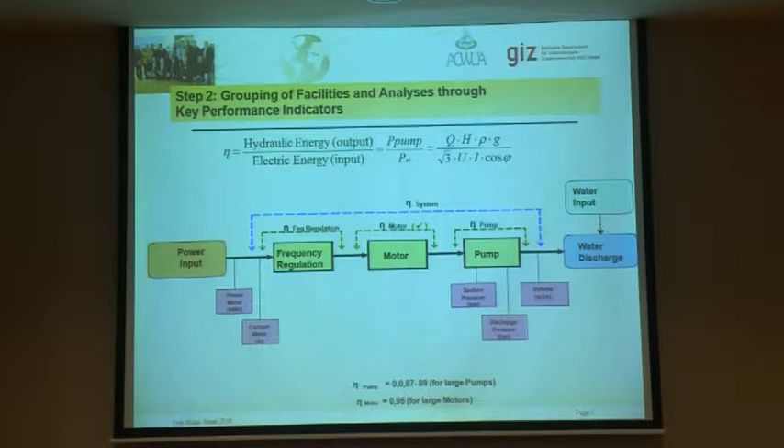We have the measurements on the power input. We can measure the kilowatts. We can measure the current. On the output, we have to measure the pressure and the flow, pressure in bar and the flow. And the efficiency is the output energy divided by the input energy. The output energy is the hydraulic energy that we give to the water. The input is electric energy that we take from the grid. And it's important to have a good efficiency.

At the bottom, it's indicated that now huge motors with the high classes should have 95% efficiency, and good pumps could have 87, 89% efficiency. But this depends on the type of the pumps. And especially we have to see if this is an individual pump for the best efficiency.

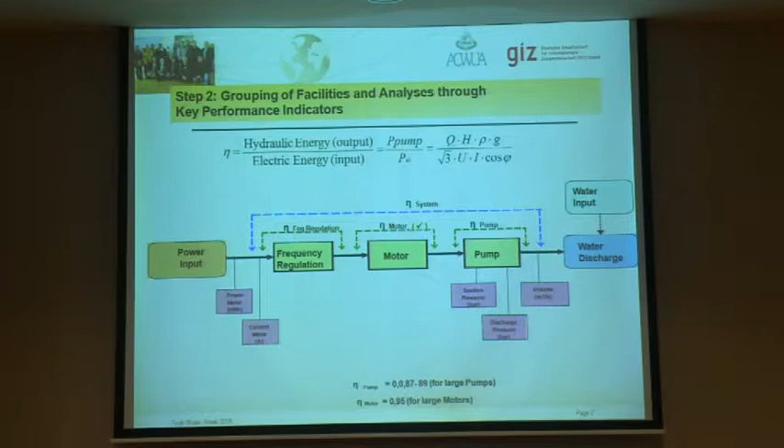But very often we have to operate pumping stations with 1, 2, 3 pumps. We have to cover the day and night supply. And we have to see how we can do this in the best way. And therefore, often we don't reach this high efficiency of an individual pump. We have to see the overall efficiency of the pumping station.

And even in Hamburg, when we achieve 70, 75% in some of the pumping stations, we are happy. If you have a pumping station with stable conditions, for example a stable geodetic head, then we can have high efficiency. But if there is a huge variation in pressure and flow, we have to accept different conditions. Okay.

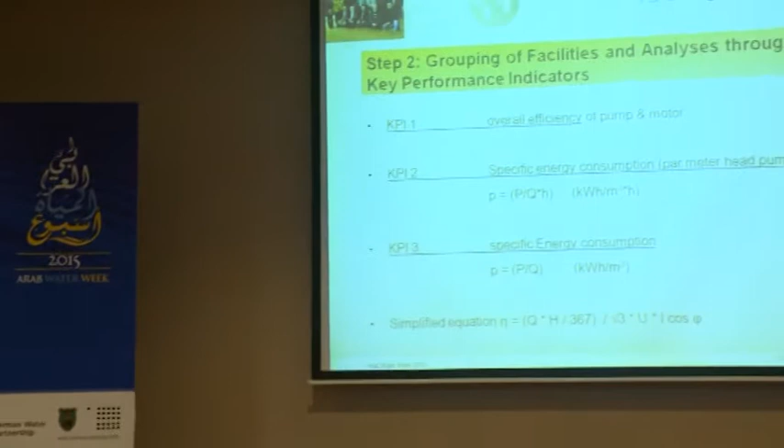We can also have the specific energy consumption per meter head pumped, because kilowatt hour per cubic meter doesn't say anything. This power capacity performance indicator, kilowatt hour per cubic meter, doesn't say anything, because it depends on the height where we are pumping. It's good to follow it up as a value to see if the pumps are still working in good condition, but if we really want to compare pumping stations, we have to divide this by the meter head pumped.

In the guidelines, it was indicated, for example, we should have energy checks, energy analysis, and energy audits. From my understanding, the energy checks should be included in the daily operation sheets, for example. In Hamburg, for example, it's with the SCADA system. Every day, at the end of the day, we already know what the efficiency is, our operators compare yesterday and today, and see if it's continuing.

Analysis should be regularly done by the technicians, not only the energy, but also the inspection of the pumps, the bearings, and these things. And the audit is done every 2 to 4 years. For example, in our case in Hamburg, our engineers are moving around. We have about 18 pumping stations. They're moving around and checking the different pumping stations in order to prepare the investments.

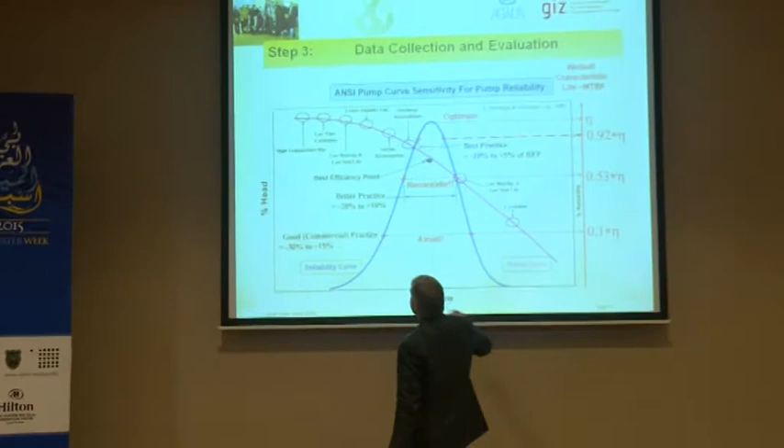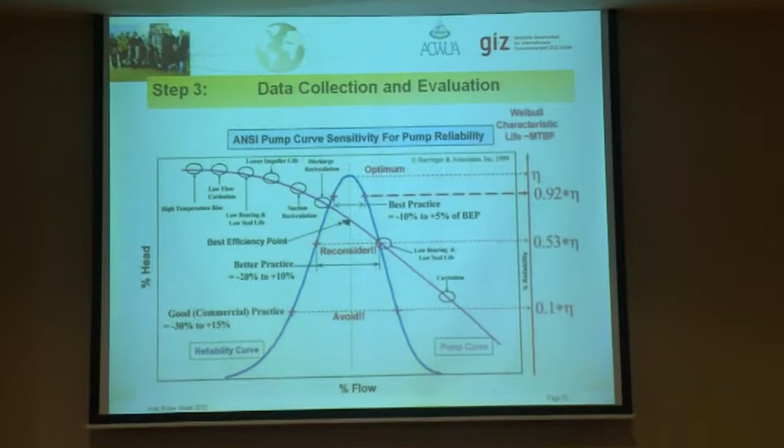And why is the potential in the pump? For the engineers, maybe it's known. For example, here you have your curve. Here is the flow, and here is the head. And this is the operation point of the pump. You have the pump curve, and the pump has one point where there's the best operation.

Number 1, when the pump is working on this operation point, the pump has a long lifetime. If we move to the left or to the right, we already reduce the lifetime of the pump by cavitation, for example. Cavitation is destroying your impeller. Therefore, from the technical point it's also important to keep the pump on this point, but this is also the best efficiency. If we move to the left or right, for example because the pressure in the system is dropping, the efficiency is going down.

Therefore, this picture you should always remember. This should be the first picture when you go to the pump: ask for the documentation from the manufacturer, compare the actual situation with the original data, compare if the point is still working. Therefore, there is a potential to analyze energy efficiency.

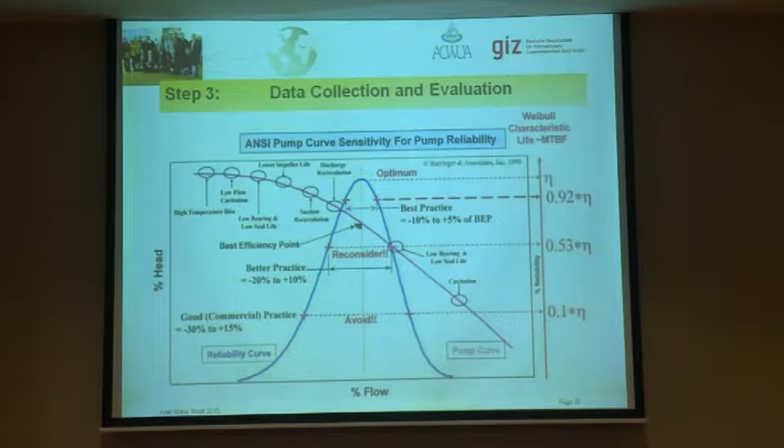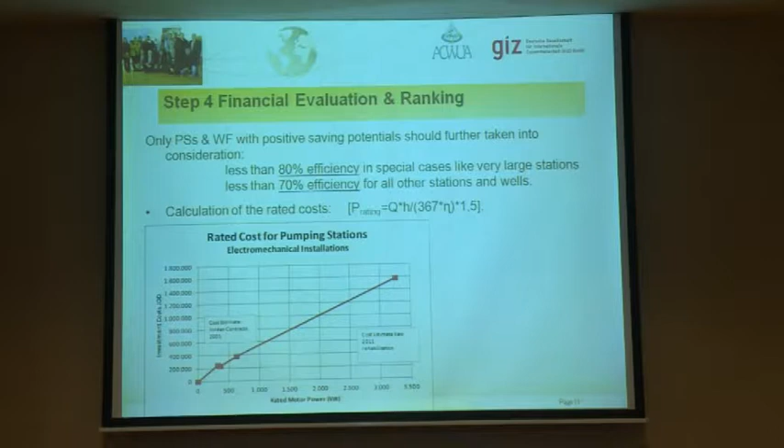And if you did these first analyses, at the final stage the audit should be done with also a financial evaluation. How we did the financial evaluation, give me only 2 minutes more. We made a curve with the investment. For example, when we have to invest in the motor, there is a certain kilowatt rating, and we see already the cost as a first guideline. You can do this for your country to calculate the investment when you want to replace the pump, knowing that for larger units you should have 80%, smaller units 70% for the investment.

This is another criteria. And once you have this table, you can use this as a management tool in order to make proposals for the budget. Maybe you do this in 2015, make proposals for the budget 2016. We in the water supply area are normally working through budgets. And once you have this decision, you can give this to the management, and the management can decide, or you can convince the management to do pump replacements, definitely also taking into consideration the condition of the pumps and what has to be replaced in order to secure your production.

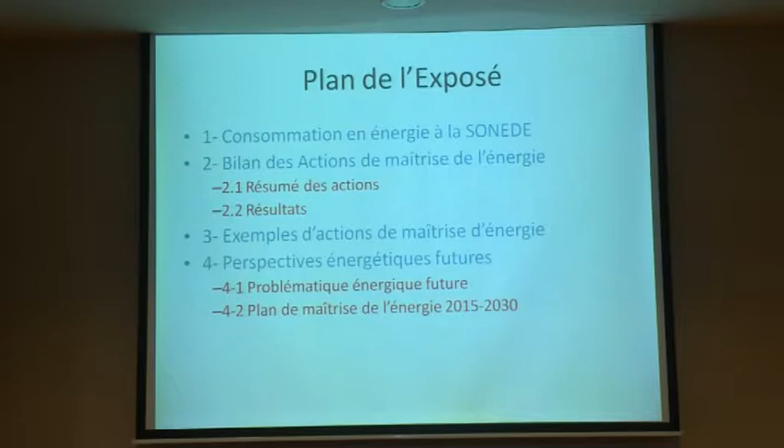So the plan of the presentation is on four axes. The first one is post energy consumption in SONEDE. The second one is about the actions to control energy consumption, some examples, and also perspectives for the future.

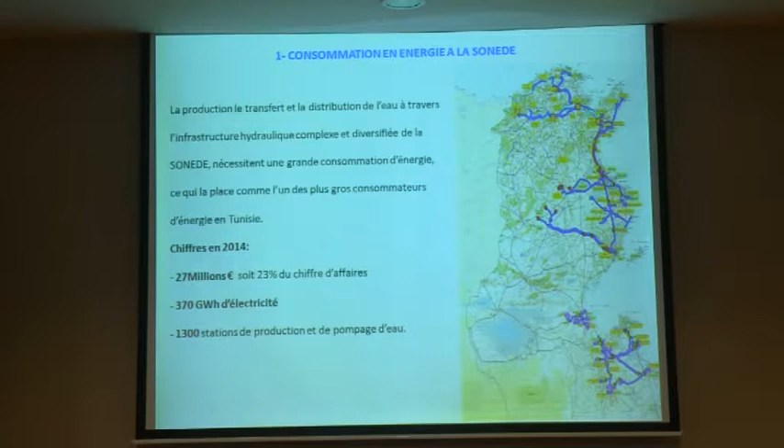SONEDE in Tunisia is one of the biggest energy consumers. In 2014, the consumption was about 370 gigawatt hours, and the main consumption centers are mainly pumping stations for water production, around 1,300.

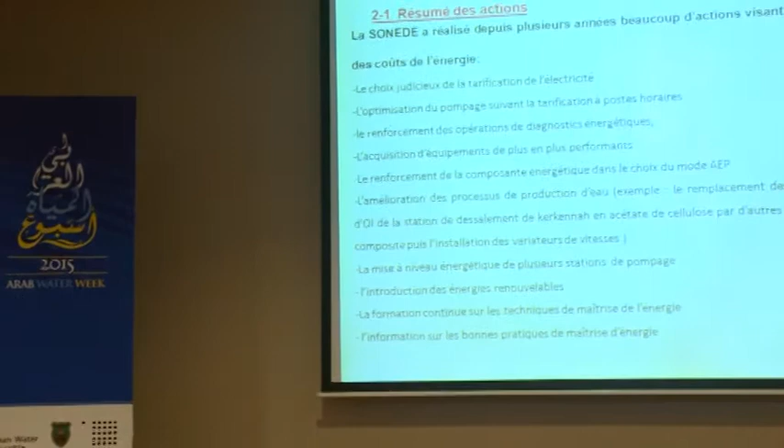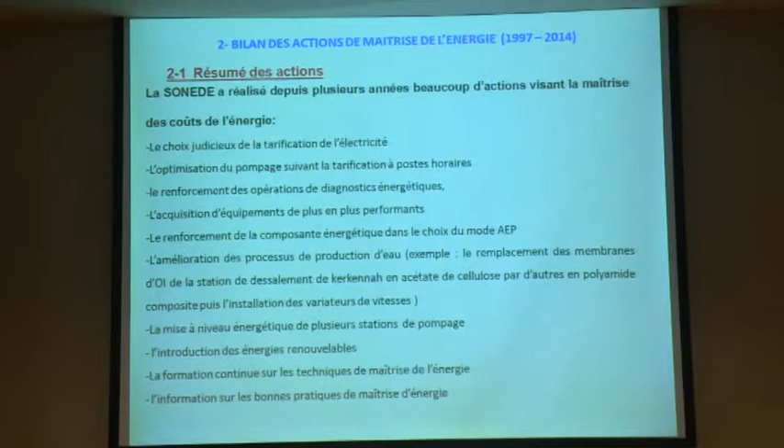Now, here there are some actions achieved or undertaken by SONEDE during the last 2 decades to control energy consumption. I will not go through all of them. Some are linked to energy tariffs. Tariffs are different during the day, during the consumption period. Some actions are related to the facilities, the rehabilitations, and the technical checks of the pumping stations.

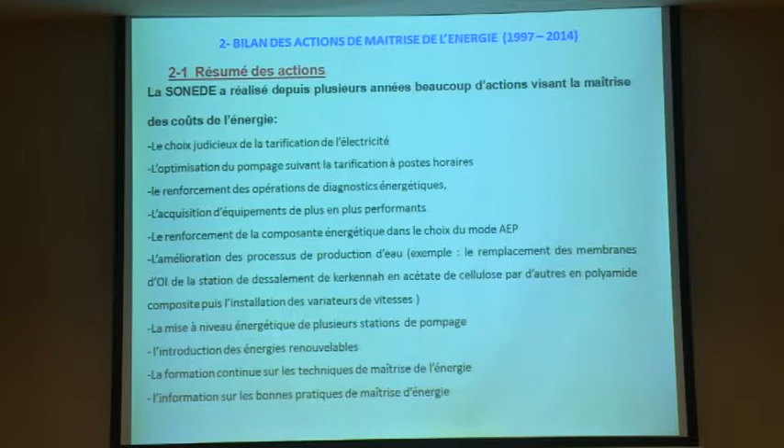Some are linked to the water production, improving the water production process, and also some other actions are linked to the capacity building of the staff, linked to different kinds of technical training and also managerial training regarding energy checks. And also SONEDE introduced renewable energy in its energy mix. And I think that's all.

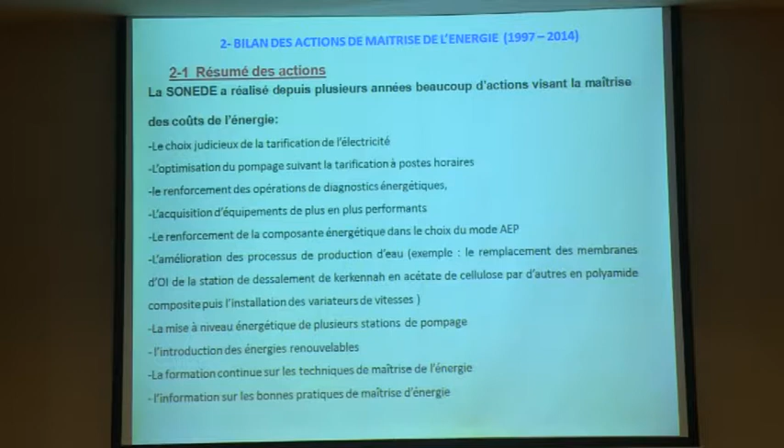So SONEDE has gone through different main periods regarding energy costs and energy consumption, because the tariffs are mainly linked to the international cost of oil. For instance, there was a big shift during the late 90s and the first years of 2000.

Trying to control mainly the consumption period during the day to reduce the financial impact, and also during the last decade progress shifting towards renewable energy.